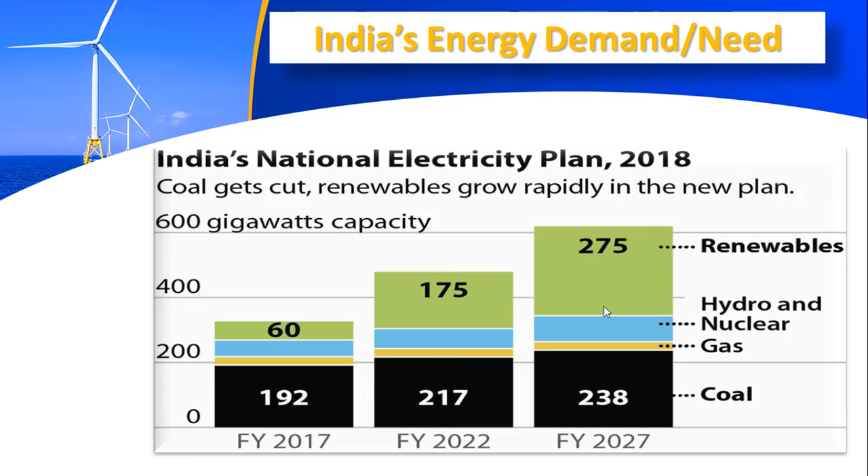One more reason to move to renewable energy sources is the pollution created by fossil fuels, that is coal and petroleum derived products like petrol, diesel, etc. Burning of fossil fuels produces more amount of carbon dioxide, sulfur and nitrogen oxides, and also causes severe climate change, global warming and greenhouse gas emissions, killing 7 million people every year.

So to make our earth free from pollution and to meet our energy demands, we have to move to renewable energy sources. For that, we have various renewable or alternative energy sources like solar, wind energy, hydroelectric power, biomass, tidal, geothermal, and also ocean thermal energies. These are the various possible cleaner energies available.

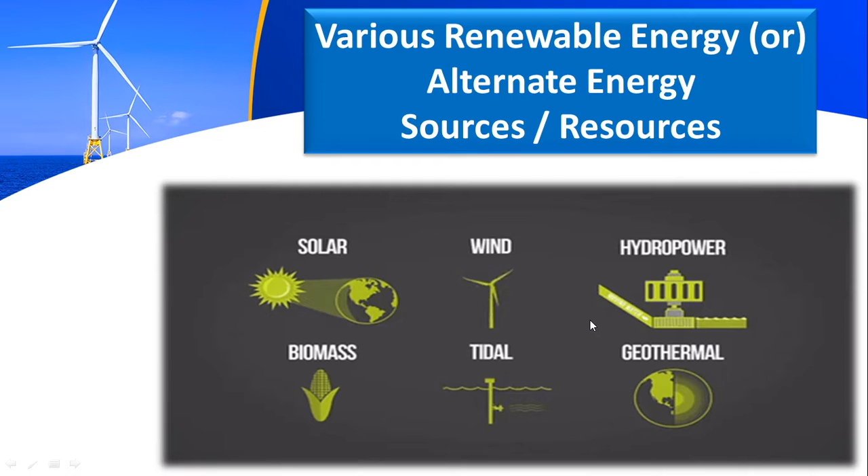Now we are going to discuss each energy in detail. We know that solar energy is nothing but the energy harvested from sunlight. Sun has two components of energy, the radiant light and heat. So we are going to convert this light and heat into thermal energy and electrical energy, depending on our utilizations.

Solar energy is the non-polluting, cleanest and most abundant renewable energy available in our Mother Earth, and we can harness this energy for generating electricity, providing light and heating water for domestic or commercial purposes.

How solar energy is harvested is mainly by photovoltaic or solar cells, the solar panels you used to hear this word. So in the solar panels, when the photon falls on that, it kicks out the electron from the outermost orbital of the semiconductor and makes the electrons pass through.

How do solar cells or photovoltaic cells work? They are actually semiconducting materials that transform sunlight directly into electricity. We know that there are two types of semiconductors, p-type and n-type.

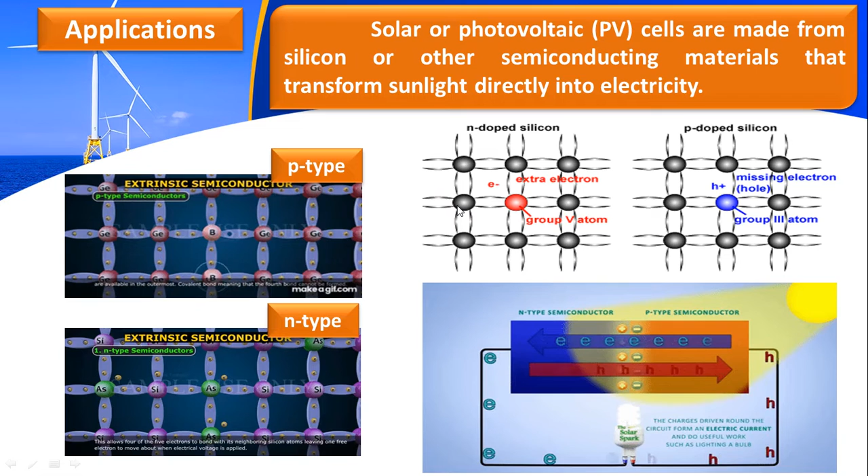When p-type and n-type semiconductors are connected, sunlight falling on the solar panel produces a barrier. From the p-type semiconductor, the holes move and form a layer, and from the n-type semiconductor, the electrons move and form a layer, so a barrier layer is formed. As a result, a potential is generated called barrier layer potential, causing electrons and holes to move in opposite directions, producing a complete circuit and generating electricity. This is how a solar or photovoltaic cell converts sunlight into electricity.

Now the photo conversion: how the radiant light of sunlight is converted into various applications. For example, we convert the radiant light of sunlight into street light by generating electricity and illuminating the lamp. Similarly, solar water pumps are produced, and the electricity produced can power vehicles, that is electric vehicles. So the photons of sunlight are converted into electricity.

Now we will see how the thermal component of sunlight is converted. We often see water heaters on the rooftops of many buildings. It contains many copper tubes placed inside a chamber. The top surface is made of glass which absorbs heat, making the copper tubes get heated. We pass cold water through these copper tubes, which are already hot due to the sunlight, and it makes the water hot by transferring the heat.

So now the hot water is produced. There is no bigger principle involved in this, just transfer of heat from the copper tubes to the water.

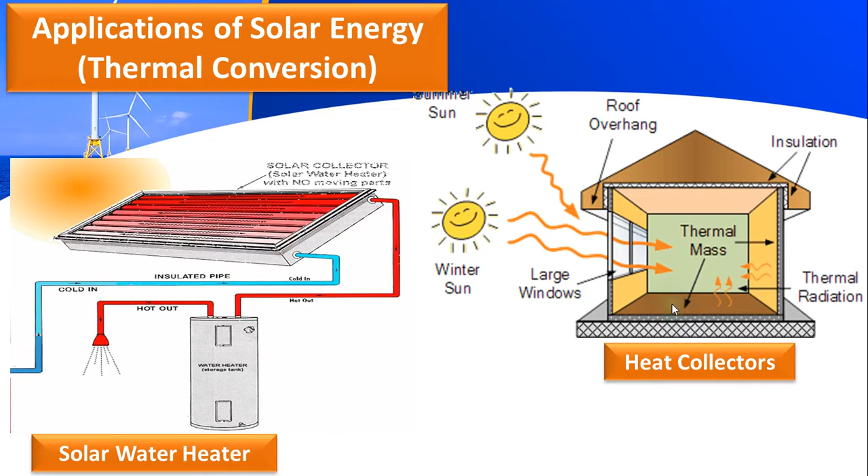Similarly, in cold countries or hill stations, houses need to be warm at night. So they have bigger glass windows and more sunlight is allowed to enter the house, and they are insulated so the sunlight does not leave easily. The thermal radiations produced stay inside the house. So the heat is collected, and the house or room becomes much warmer compared to the external temperature.

Now we are going to discuss wind energy. Wind energy is also another form of solar energy because the sun heats the air and makes it move, hence it is called wind. Wind energy is nothing but the kinetic energy of air in motion, also called wind. The energy harnessed from moving air or wind is called wind energy.

In 2018, we produced 591 gigawatts of wind energy worldwide, and India produced 35,000 megawatts of wind energy by September 2019. Our target for 2022 is 60,000 megawatts of electricity through wind energy, and Tamil Nadu is the highest producer of wind energy in our country. This shows that the amount of electricity produced through wind energy is increasing alarmingly, and it is also a good sign.

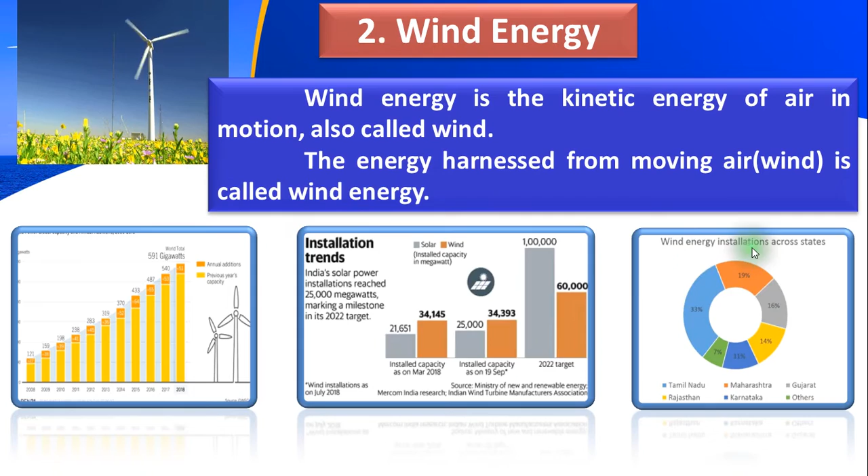Now, how do windmills work? The kinetic energy created by air in motion, or wind, is transformed into electrical energy using windmills or wind turbines. The wind first hits a turbine blade, causing it to rotate, and the turbine connected to it rotates as well. For example, the blades rotate due to the wind hit, and this rotates the turbine, changing the kinetic energy to rotational energy, moving a shaft connected to a generator and producing electrical energy through electromagnetic induction.

Inside, between two strong permanent magnets, the shaft is rotated, and through the principle of electromagnetic induction, electricity is produced.

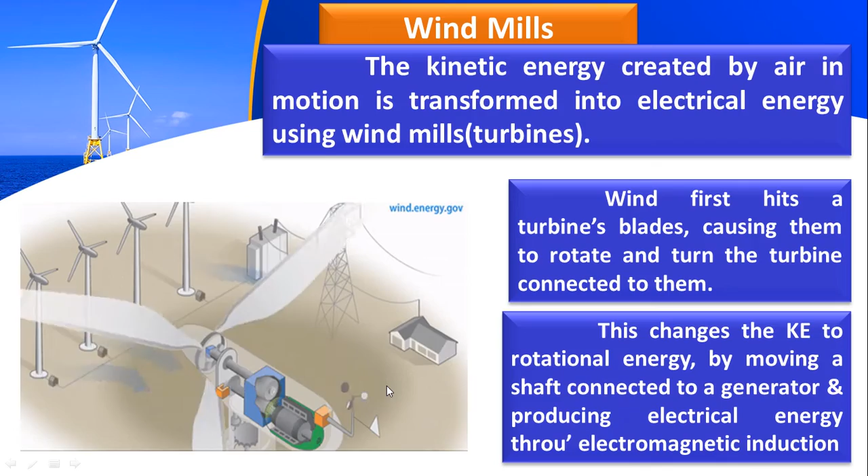So what are the various factors affecting power production in windmills? The output is highly calibrated, meaning the dimensions of the rotor affect the output, and the output is proportional to the dimensions of the rotor and to the cube of the wind speed. The amount of power harnessed depends on the size of the turbine and the length of its blades. Theoretically, when wind speed doubles, the wind power potential increases by a factor of 8, since output is proportional to the cube of the wind speed.

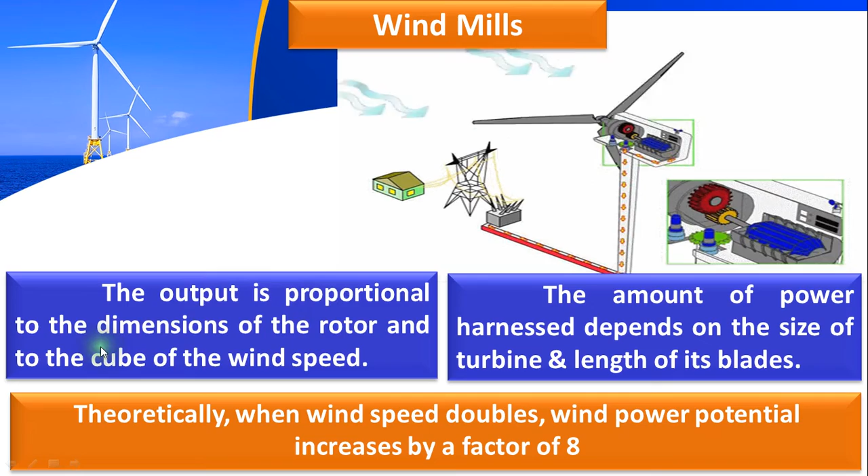The various possible wind energy harnessing equipment or designs include wind farms, which are nothing but windmills connected in series. Similarly, ladder mills and sky sails are some other forms of wind energy harnessing designs.

Now we are going to see about ocean thermal energy, which is the energy produced by using the temperature difference between various ocean currents. For example, the deep ocean is much colder, whereas the tropical surface waters of the ocean are warmer. Due to this difference in temperature, we harvest it as energy.

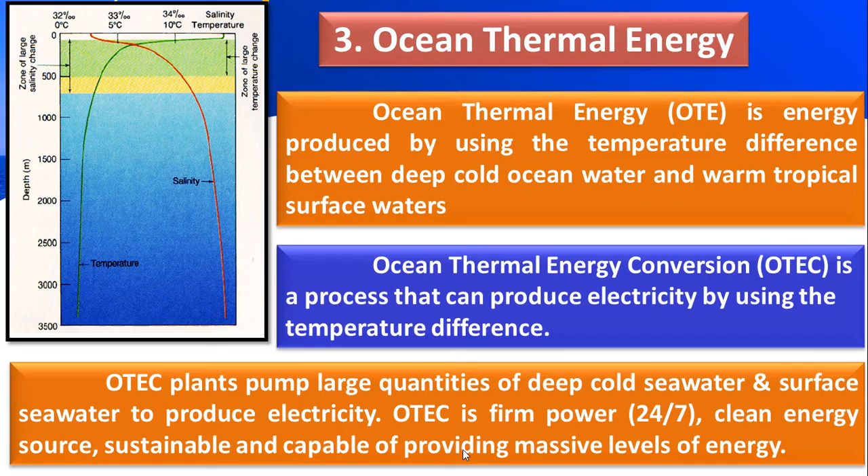How does OTEC work? Here you can see. The temperature difference between the surface water and deep ocean water is utilized here. A working fluid is used to convert the heat of the surface water. For example, ammonia is usually used as the working fluid because its boiling point is around minus 33 degrees Celsius, meaning even a small rise in temperature causes the ammonia liquid to evaporate, and the ammonia vapors are allowed to make the turbine rotate, which in turn is connected to the generator that produces electricity.

On one side, the hot surface water is used for vaporizing ammonia. On the other side, the vapor ammonia is condensed to liquid ammonia using the cold waters. So we are utilizing both waters to make the turbine rotate and produce electricity. The ammonia is evaporated using the hot surface waters, the turbine is rotated because of the ammonia vapor, and then the vapor is condensed by the cold waters of the deep ocean. This is how ocean thermal energy is converted and utilized.

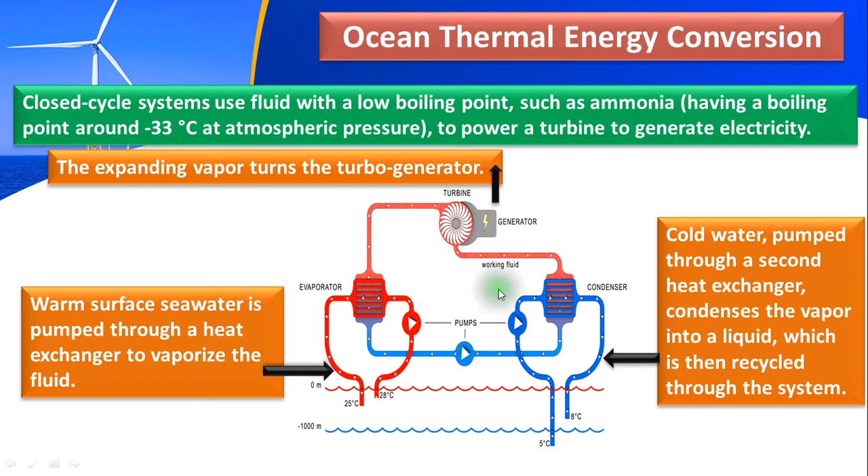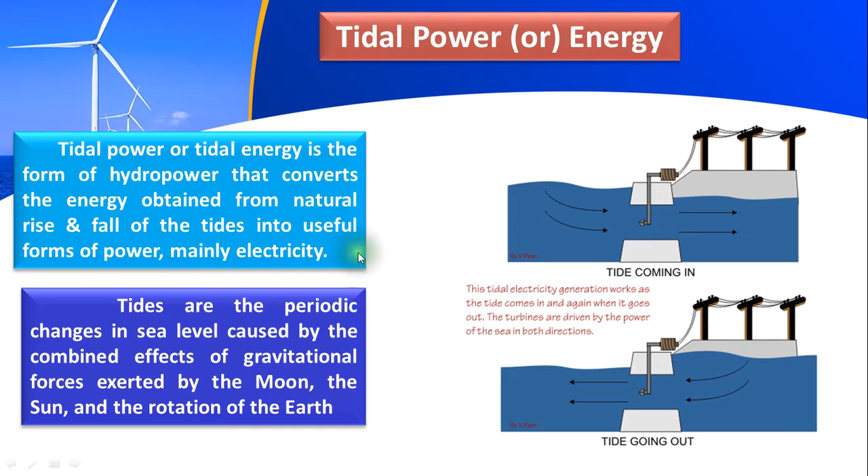The next one is also ocean energy, called tidal power or tidal energy. Instead of temperature difference, here we use the kinetic and potential differences of the various tides. Tidal power is a form of hydropower that converts the energy obtained from the natural rise and fall of the tides into useful forms of power, mainly electricity. The natural rise and fall of tides happens all the time because of periodic changes in sea level caused by the gravitational influences of the moon, sun, and rotation of the earth. Because of this, the tides move up and down, rising and falling, and as a result that kinetic energy is harvested into electricity.

How it is harvested is very interesting. Tidal power has two forms: the dynamic energy of the sea currents, and the potential energy due to the change of water levels. The dynamic energy can be used by turbines or fences in a tidal stream system, meaning that by analyzing the dynamicity of the tides, we build tidal turbines or tidal fences. Based on their rotation, we generate electricity through the principle already available.

If there is a difference in the potential energy of the tides, then dams are generally required, called barrages. A barrage is usually built at the estuary to separate the fresh water from the sea. We have already discussed estuaries in the ecosystem section: when a freshwater ecosystem meets a saltwater or marine ecosystem, that portion is called the estuarine ecosystem. At that place, they construct dam-like structures and place turbines there.

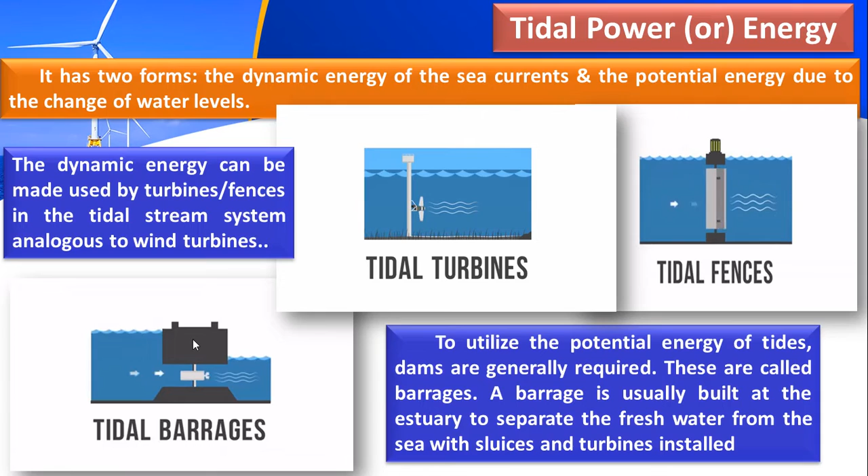When the water flows out from the ocean, it makes the turbine rotate. Similarly, when water enters from this side, the turbine rotates and produces electricity. So this is how the dynamic energy of the sea currents and the potential energy due to the change of water levels is harvested into electricity.

Now we are going to see about another interesting renewable energy source, geothermal energy. Usually the earth's surface is much cooler compared to the earth's crust. Inside the earth we have a huge amount of heat.

Geothermal reservoirs are pools of water heated by magma deep below the surface. Water or steam can escape from cracks in the earth in the form of geysers. In California, you can see a number of natural geysers, and the ability to harness the steam is what powers a geothermal power plant. Since the magma makes the water convert into either hot water or steam, this hot water or steam is utilized in electricity generation. Hence it is called geothermal energy.

Geothermal energy is the heat derived within the subsurface of the earth. Where is the heat from? It is contained in the rocks and fluids beneath the earth's crust and can be found as far down as the earth's hot molten rock, that is the magma. The water or steam carries the geothermal energy to the earth's surface in the form of heat. Depending on the characteristics, geothermal energy can be used for heating purposes, or it can be harnessed in the form of electricity.

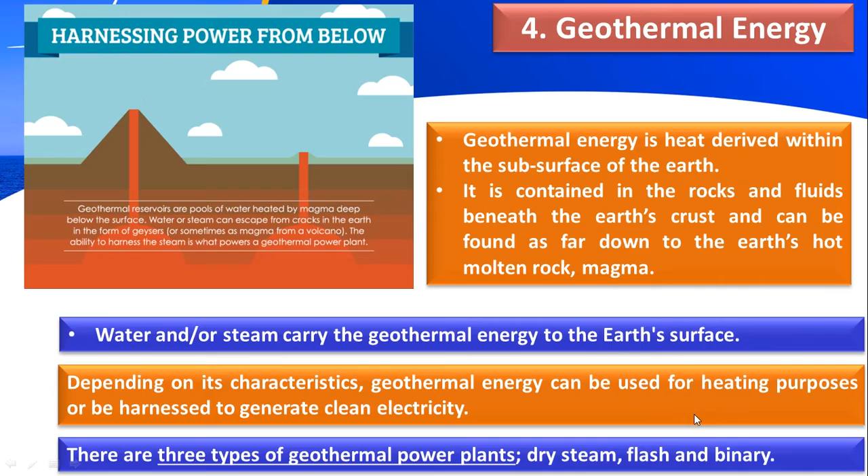First, the dry steam power plant. Here we are simply utilizing the hot steam which is produced from the earth's crust, and this hot steam is forced to rotate the turbine. So directly the hot steam is passed over the turbine which generates power.

Next is the flash steam power plant. Here the hot water from underground is pumped into a cooler temperature flash tank. So here we are not passing the steam directly. Instead, we pass it into the flash tank where some other fluid is present. This hot water makes the liquid convert into steam, and that steam is passed over the turbine. So instead of hot water, we are simply forcing the steam to pass through, converting some other liquid into steam and passing this.

In the binary cycle power plant also, we are converting a liquid, a low boiling liquid, into steam, and we are passing that and making the turbine rotate.

So the main difference is: here we are utilizing the steam directly without any fluids or liquids, hence it is called dry steam power plant. In the flash type, we make hot water pumped into a cooler temperature flash tank, then the change in temperature causes steam which helps run the turbine. In the binary type, a low boiling liquid is converted into steam and made to pass through the turbine, which generates electricity. So these are the various possible geothermal power plants by which heat or steam is converted into electricity.